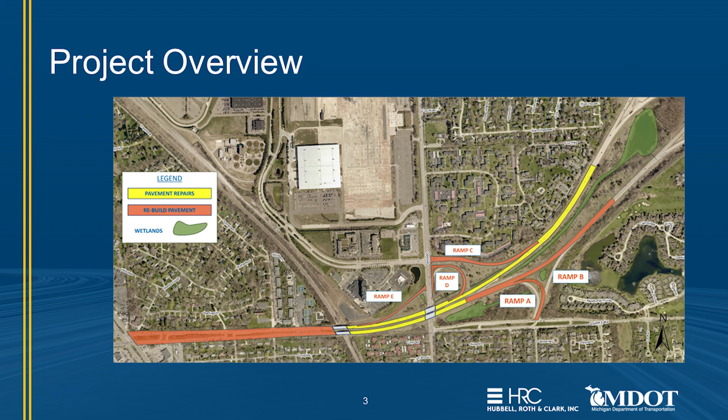The specific study area we are focused on is the I-75 Business Loop and Opdyke Road interchange. However, our study includes other surrounding roadways including Woodward Avenue, I-75, M59, Adams Road, and Telegraph Road. The project includes reconstructing the I-75 Business Loop from Woodward Avenue to I-75. However, this study and video concentrate on existing safety concerns of Ramp B and the proposed plan to remove this ramp. Ramp B is currently the on-ramp from Square Lake Road.

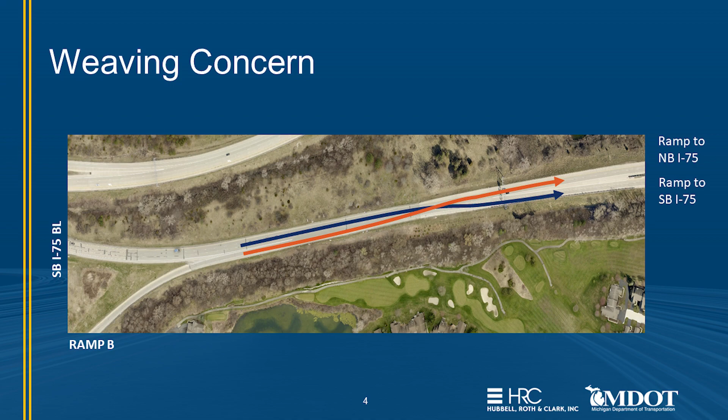Currently, the safety concern is the weaving conflict between vehicles on the ramp and I-75 Business Loop. Specifically, the insufficient distance between Ramp B to I-75 north and southbound ramps. The video shows the weaving maneuver that is a concern. Often, the traffic is required to slow down, speed up, or shift abruptly, which can lead to potential conflicts and even severe crashes. The goal is to reduce crashes and improve safety.

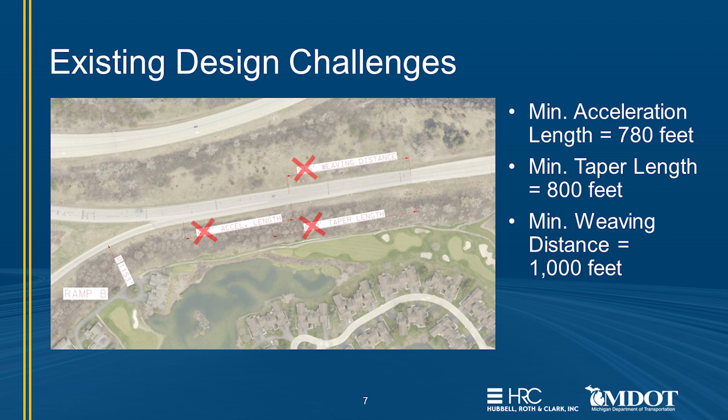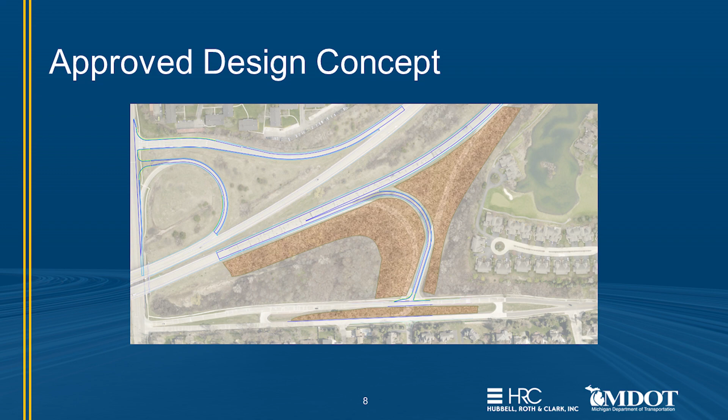Road design standards are in place to ensure the safety of the public. For a safe weaving movement, there are minimum distance requirements for design elements. At this location, none of the standards are met. In fact, the existing weaving distance is approximately half of what it should be. After careful consideration and evaluation of multiple design options, our proposed design is to eliminate Ramp B. The goal is to improve safety and to avoid or minimize impacts to environmental assets.

So, how do you get to I-75 if the ramp is closed? There are a few options. For those travelers on westbound Square Lake or northbound Opdyke, follow Ramp D to continue onto Square Lake to use an existing turnaround or Michigan left crossover to continue onto I-75. If you are traveling southbound on Opdyke Road, you can utilize Ramp E and follow a similar maneuver. Go to one of the crossovers and continue along eastbound towards the I-75 interchange.

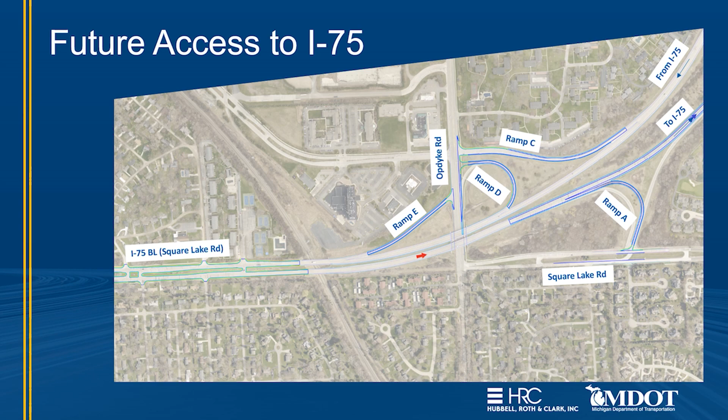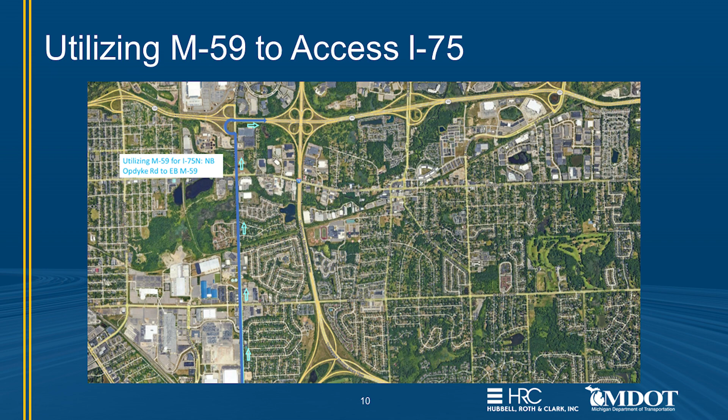You could also use M59 to access I-75, which is approximately 3 miles from Ramp B. In addition, you could also utilize Adams Road to access I-75, which is approximately 2 miles from Ramp B.

When a revision to an interstate interchange is considered, a study is performed that evaluates all impacts of the potential change, including vehicular movement, safety, environmental concerns, air quality, biological, environmental justice, historic, recreation, and noise. In addition, public feedback is vital, and that is where the project is now, gathering your comments on the preferred alternative of closing Ramp B.

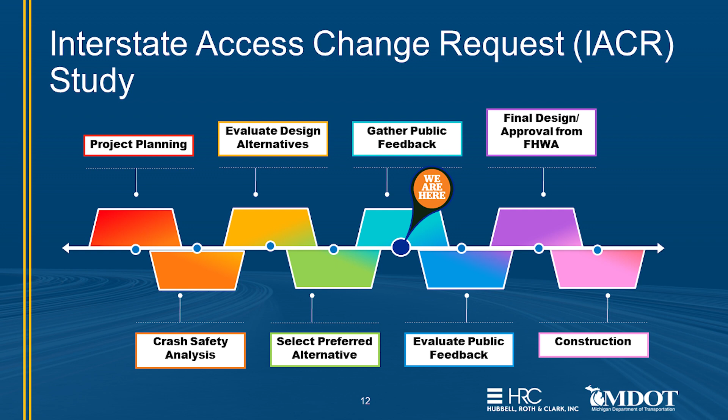We invite you to come to our public meeting for an open house discussion to provide feedback to the project design team regarding the Ramp B closure. The meeting will be held at the Marriott Hotel located at 3600 Center Point Parkway in Pontiac on Monday, February 27th, 2023 from 4 p.m. to 7 p.m. If you've missed or couldn't make the meeting or need additional information, please visit the project website.